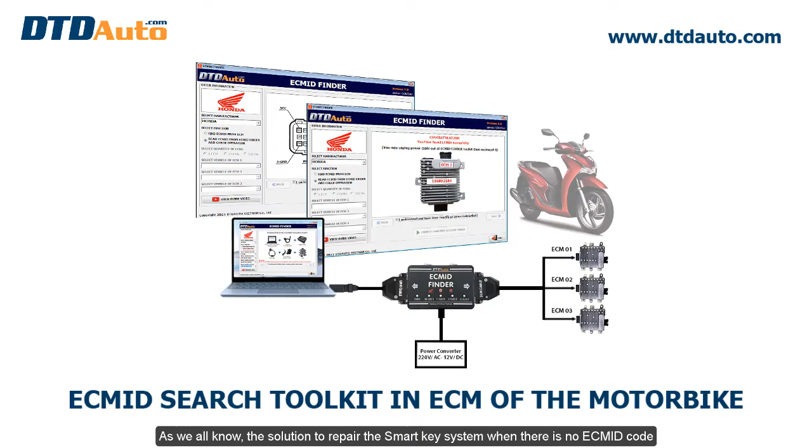As we all know, the solution to repair the smart key system when there is no ECMID code has many ways, depending on the specific situation of each customer, their personality, awareness, qualifications, and finances. If your customer is careful and has financial conditions, you can advise them to buy a new ECM immediately because it is not worth much money to them. This is also the design intent and wishes of the manufacturer.

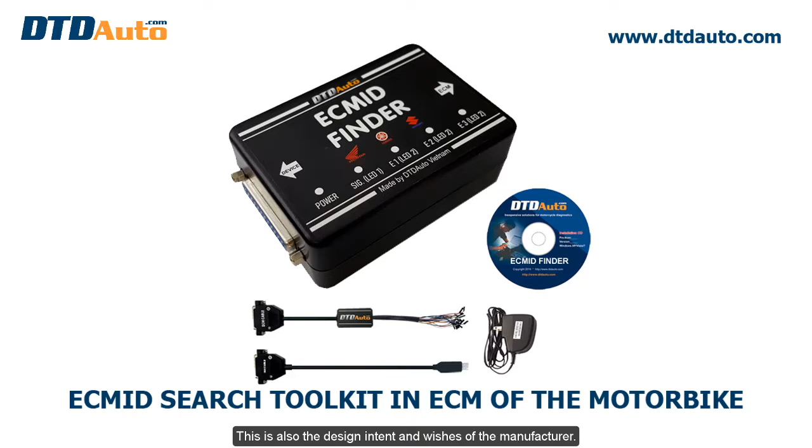If the customer does not replace the new ECM due to lack of financial conditions but wants to reuse the old ECM, there are many different ways to find the ECMID identification code of the ECM.

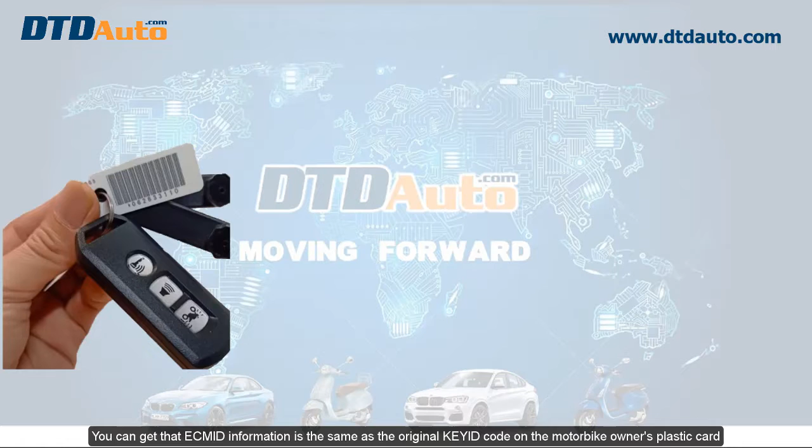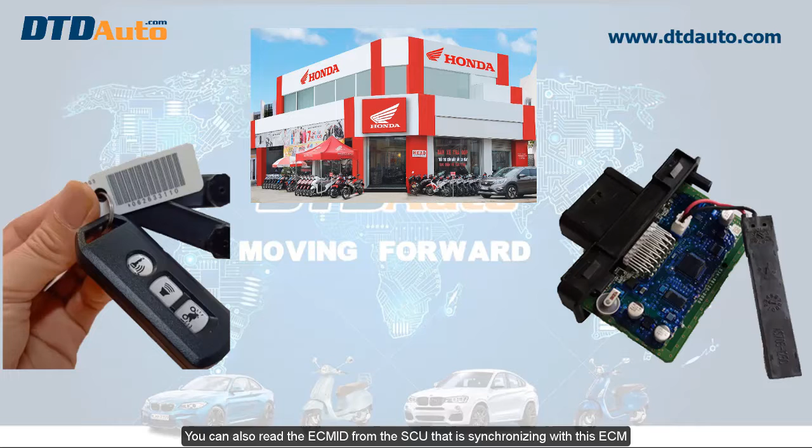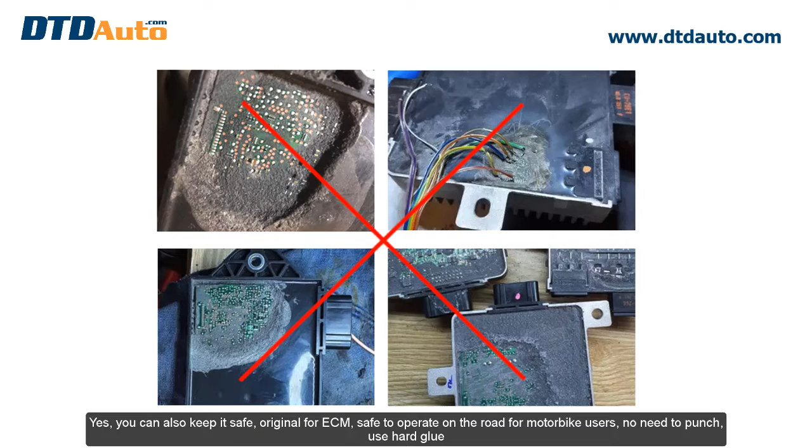You can get that ECMID information the same as the original key ID code on the motorbike owner's plastic card. You can contact the manufacturer to be provided with a valid original ID number, which will be the ECMID. You can also read the ECMID from the SCU that is synchronizing with this ECM. Or you can accept the risk of damage to the ECM, punching or breaking the ECM's hard glue to read the ECMID.

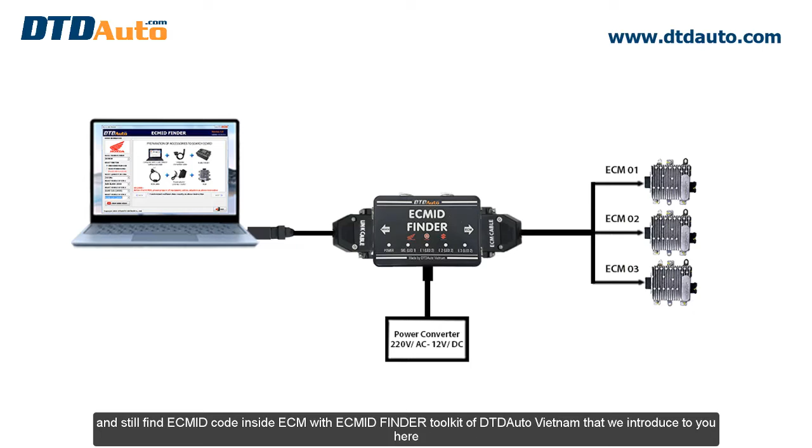Yes, you can also keep the ECM safe and original, safe to operate on the road for motorbike users, with no need to punch or break the hard glue, and still find the ECMID code inside the ECM with the ECMID Finder Toolkit of DTD Auto Vietnam, which we introduce to you here.

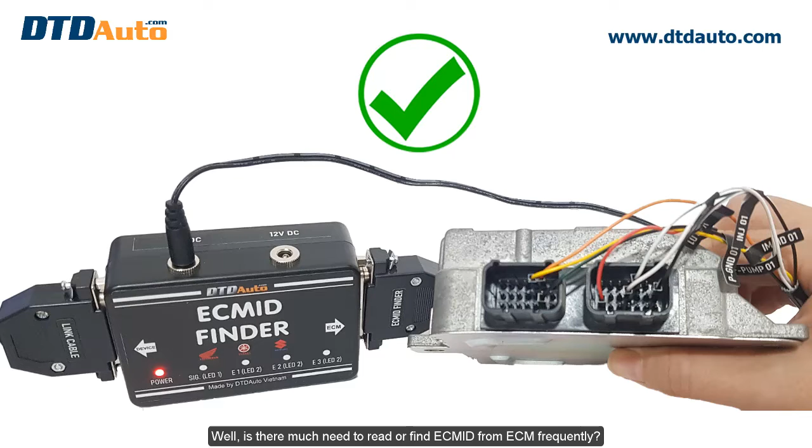Well, is there much need to read or find ECMID from ECM frequently? The answer is not much. This is not a frequent need, such as adding keys or losing all keys. Reading ECMID from SCU is much more convenient and simple, so most people use this reading method.

Users always want to choose the most convenient way for themselves, for their situation and conditions, in the simplest and safest way. Each way to find ECMID has its advantages and disadvantages, depending on the specific situation that the user agrees with the customer to choose.

Sometimes the customer has good financial conditions. They need to have an original ECM and safe operation of a motorbike on the road, so they want to buy a new ECM immediately, thus increasing more economic income, safer, better, less warranty issues, better for both technician and customers, stimulating consumption demand for economic goods.

DTD Auto introduces the product ECMID Finder, a solution to find ECMID by random probability method directly from ECM for vehicles without needing to drill the hard glue of ECM, to ensure safe operation on the road for both vehicles and customers.

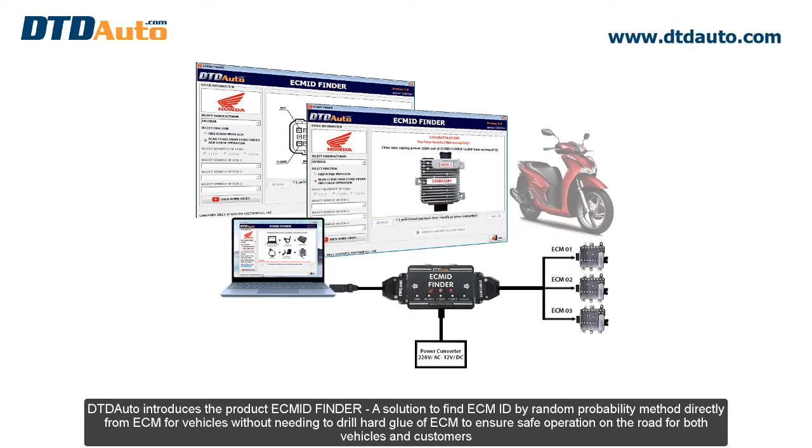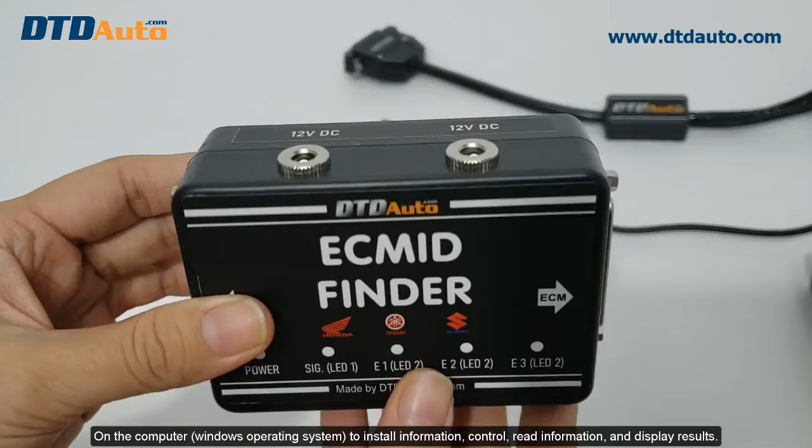The kit includes a separate set of electronics and cables designed to work with two independent power supplies. It can work independently, separately, continuously 24/24 hours and days, and is compatible with application software on the computer, Windows operating system, to install information, control, read information, and display results.

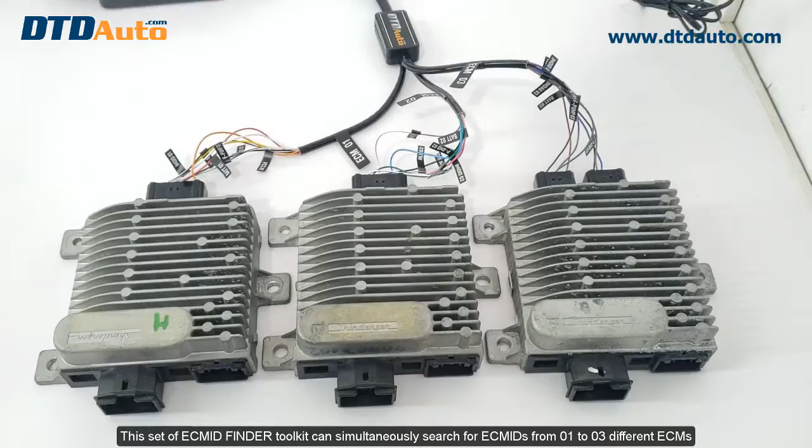This ECMID Finder Toolkit set can simultaneously search for ECMIDs from 1 to 3 different ECMs, and at the same time fully automatically store and handle the unfortunate situation of unexpected power supply loss. The toolkit uses a smart algorithm to find the ECMID after a certain amount of time.

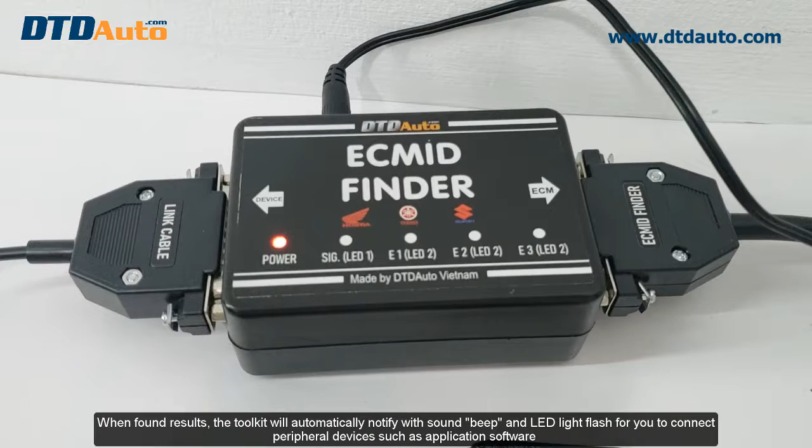When results are found, the toolkit will automatically notify with sound, a beep, and LED light flash, for you to connect peripheral devices such as application software on your computer to read the results of the ECMIDs found in the toolkit. The ECMID will be displayed on the product's application software on the computer.

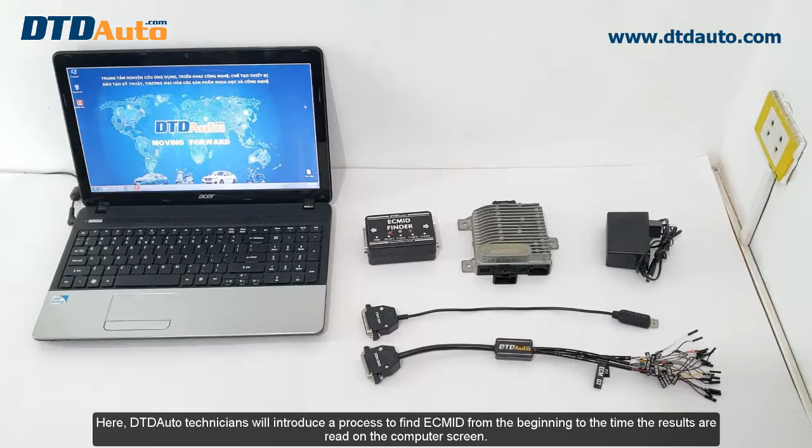Here, DTD Auto technicians will introduce a process to find ECMID from the beginning to the time the results are read on the computer screen. Invite you to join us.

First we will start the ECMID Finder application on the computer, then follow the instructions on the computer screen step by step.

First, please select a manufacturer. Next, select the function, Find ECM ID from ECM. Next, choose the amount of ECM to perform. Continue, select ECM type and part code.

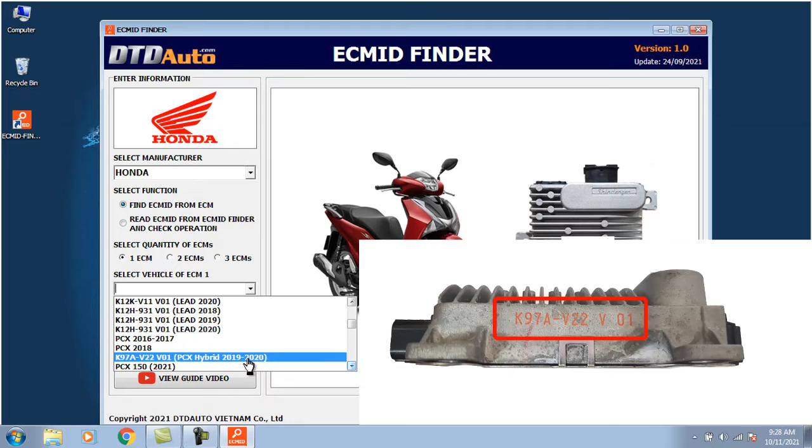Before finding the ECM ID, please prepare all equipment, cables, and adapters as per the instructions. Connect the ECM cable to the ECM as instructed. Click Connection Guide to view the connection diagram between the ECM ID Finder and ECM.

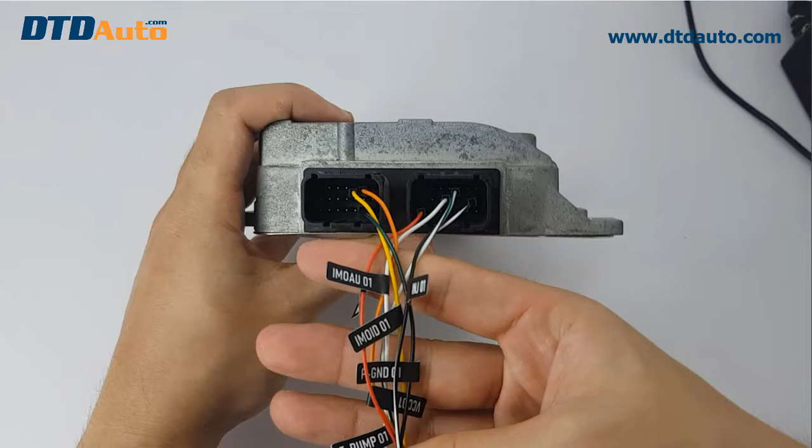Connect the ECM ID Finder to the computer and ECM as instructed. Supply power for the ECM ID Finder Toolkit using a power converter from 220 volt AC to 12 volt DC.

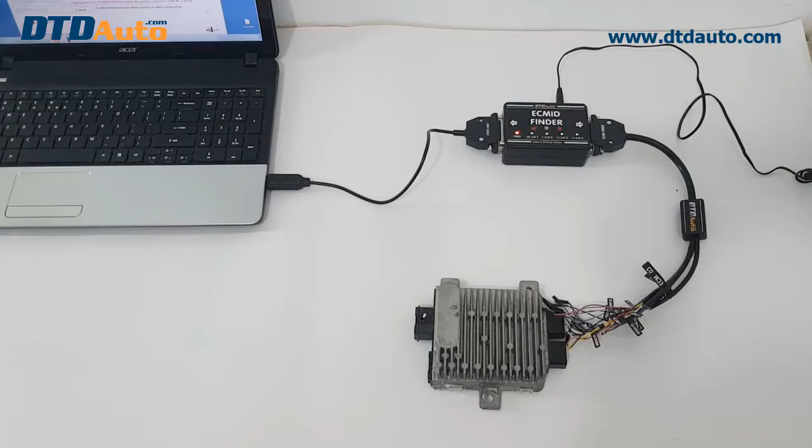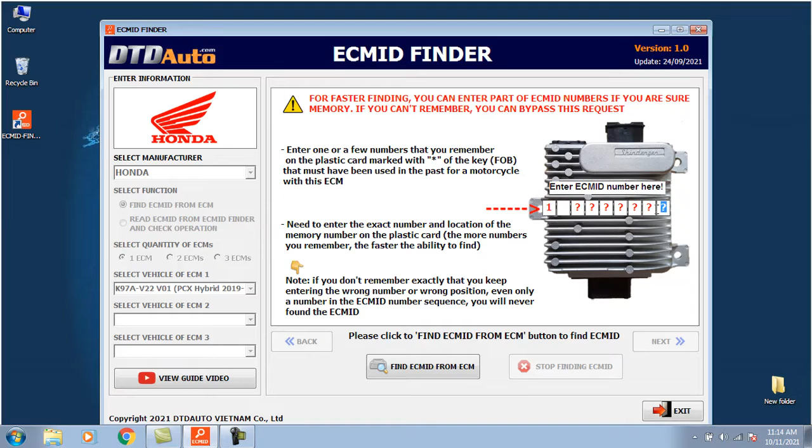For faster finding, you can enter part of the ECM ID numbers if you remember them. If you can't remember, you can bypass this request. Please read carefully the important notices and notes when using this toolkit.

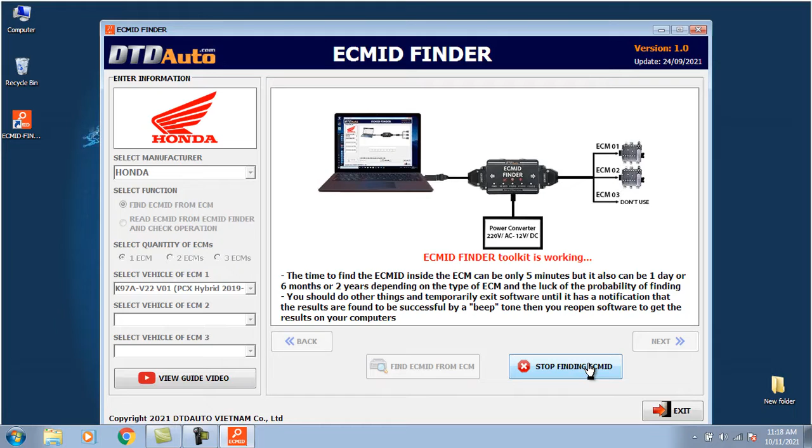The ECM ID Finder Toolkit is now working. You can unplug the ECM ID Finder Toolkit from the computer.

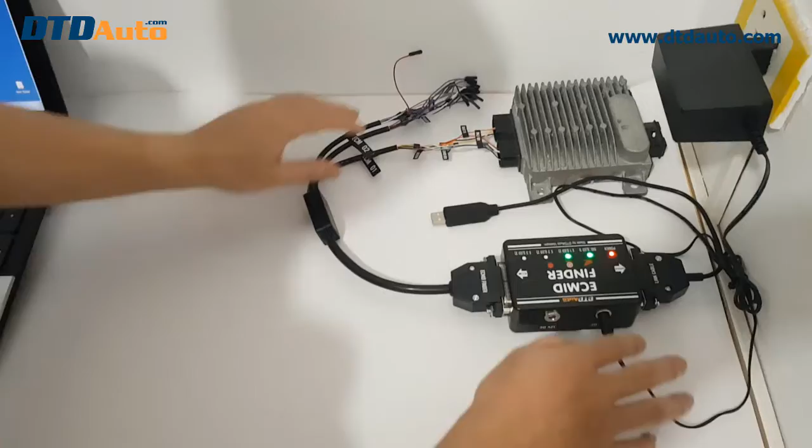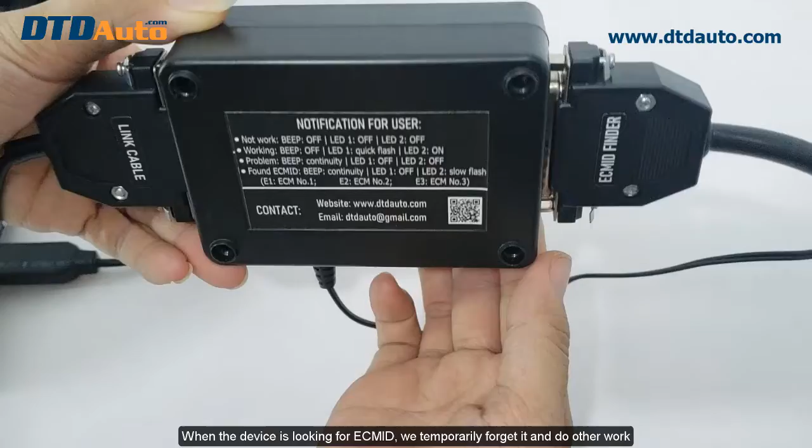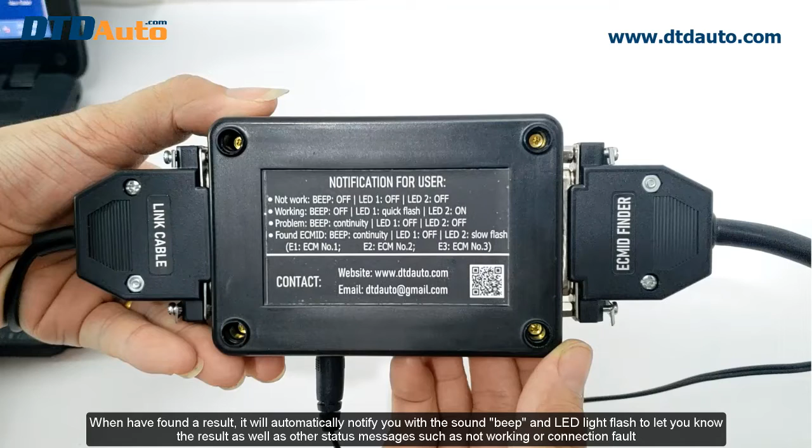While the device is working, I will introduce some more useful features. When the device is looking for the ECM ID, you can temporarily forget about it and do other work. The device operates continuously 24/7, independently, like a Bitcoin mining machine. When it finds a result, it will automatically notify you with a sound, a beep, and a flashing LED light to let you know the result, as well as other status messages such as not working or connection fault. You can see detailed instructions on the back of the electronic box.

In the unfortunate situation of unexpected power loss, there's no problem. The device has an intelligent algorithm design that automatically stores data and will automatically resume when power is reconnected, without starting from the beginning and without searching again from the start position.

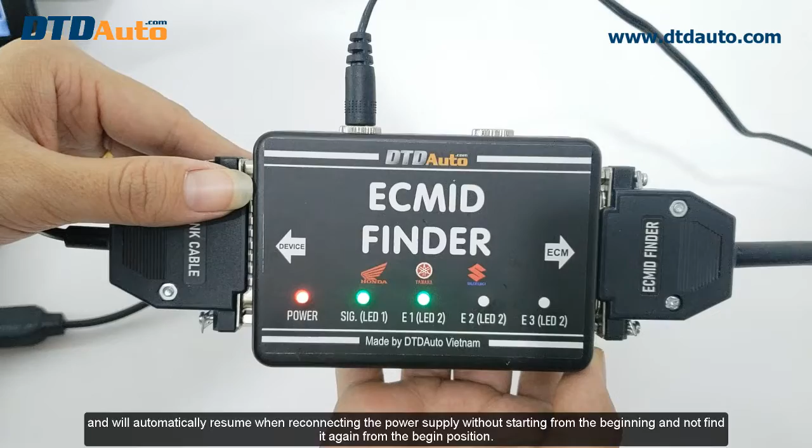The tool can find the ECM ID from 1 to 3 different ECMs at the same time.

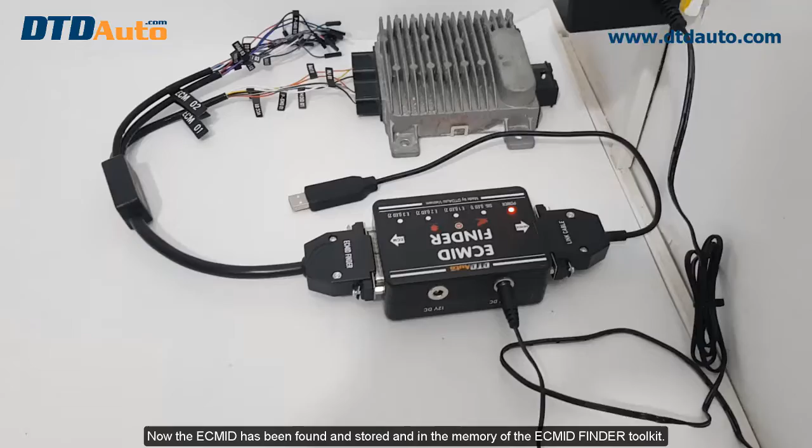We can temporarily forget about it now, leave it here, and go do other work, and when results are available, the device will notify us. Yes, the toolkit has already reported the results, friends. Now the ECM ID has been found and stored in the memory of the ECM ID Finder toolkit. The next job is to connect the toolkit with the application software on the computer to read out the results.

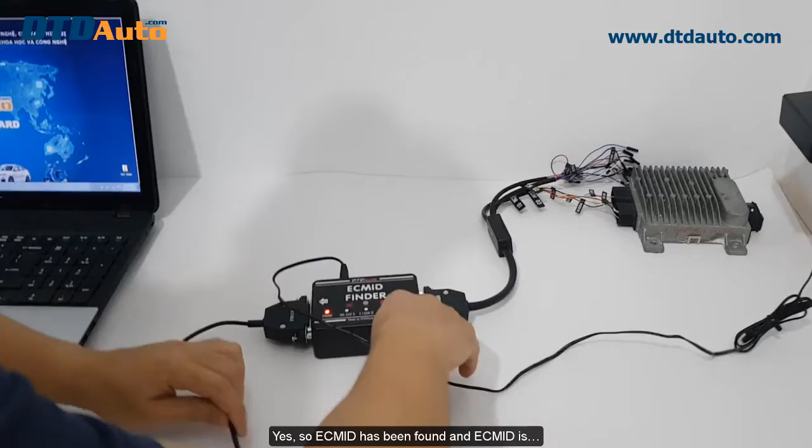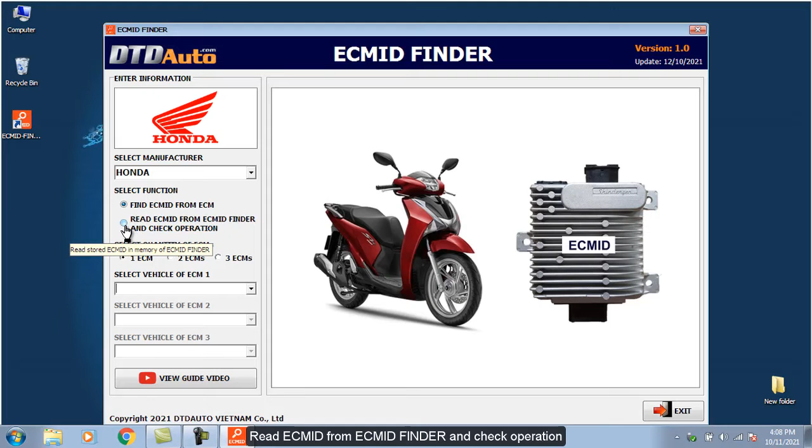Read the ECM ID from the ECM ID Finder and check the operation. This requires connecting the ECM ID Finder to the computer as instructed. Yes, so the ECM ID has been found, and the ECM ID is 1168921884. Now we can use it to synchronize and start the engine with this ECM ID.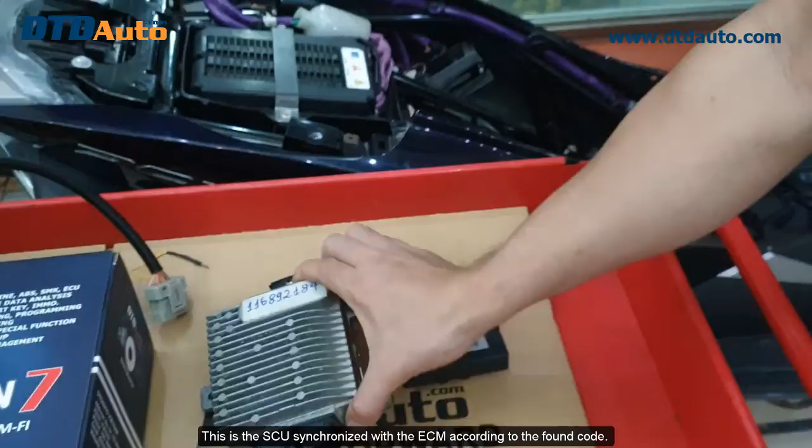This is the SCU synchronized with the ECM according to the found code. Now, let's plug everything into the motorbike to check.

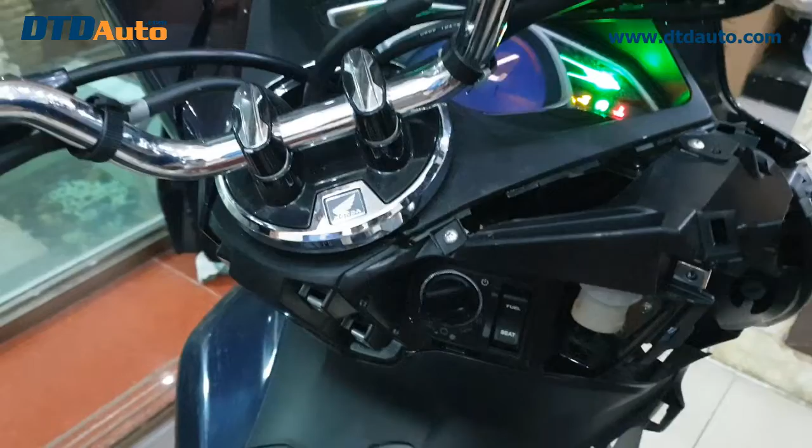Okay, the engine is starting now. We are successful.

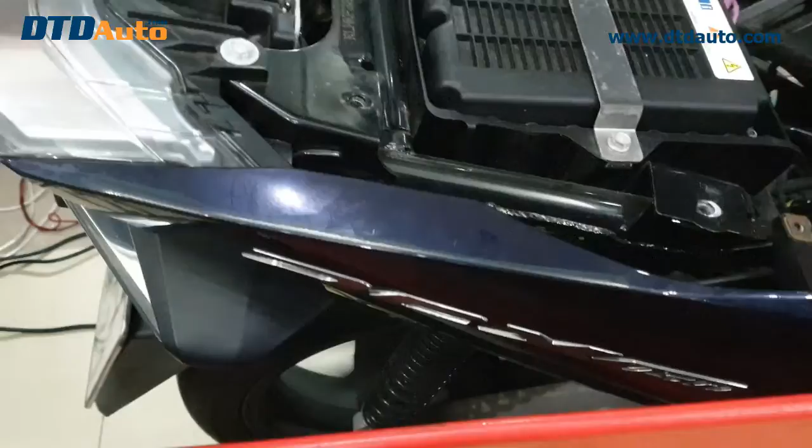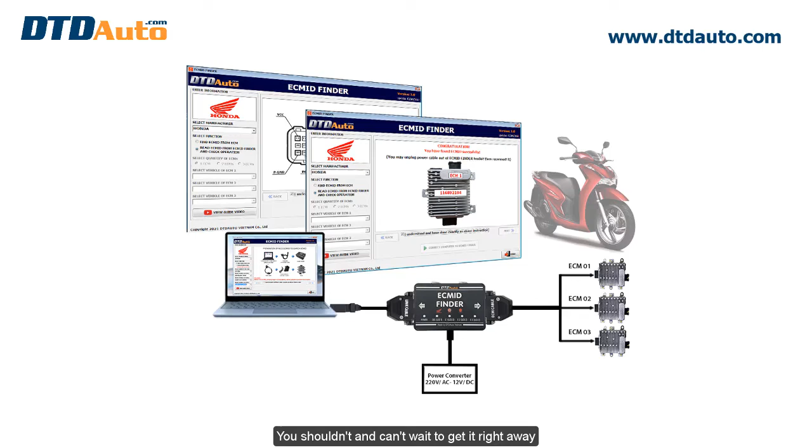Thinking about using this solution is like changing the gas in the family. You shouldn't and can't wait to get it right away, but you should immediately replace it for the customer with another ECM that already has an ID, for temporary use.

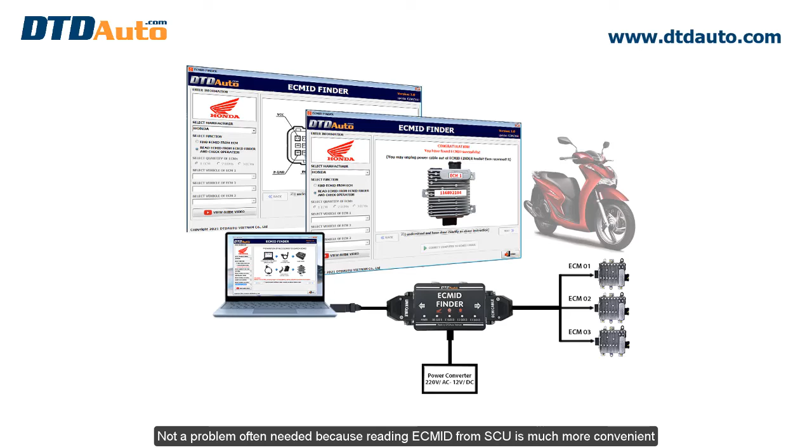Finding this ECM ID can be done later and maybe installed for other customers. However, this work is not a priority solution and is not often needed, because reading the ECM ID from the SCU is much more convenient, so you need to clearly define your purpose and need to use this device accessory.

The chances of finding the ECM ID depend on many factors and have different total times by random probability, so it could take maybe 15 minutes, or also a few days, a few months, or a whole year. But finding the ECM ID is a sure way to succeed—the difference is only that it can be fast or slow.

The device also supports the ability to search across many different interruptions, not necessarily running continuously. Products are also updated automatically according to monthly and yearly development, like others.